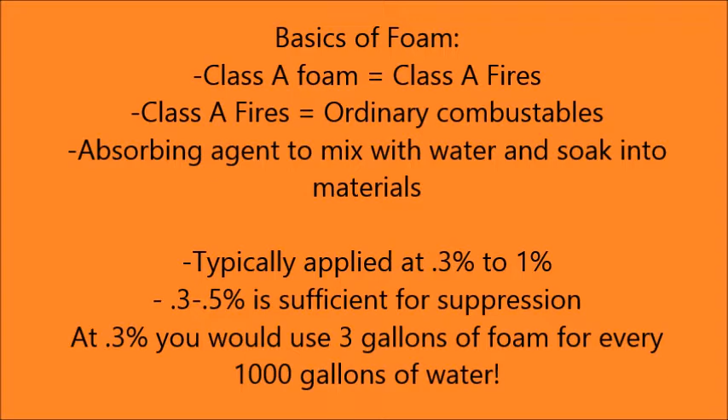Unlike Class B, you can also mix it. We can use our Class A foam for a while and then decide, you know what, we're wasting it. Let's shut it off and use straight water. Where Class B, once you revert to foam, you're going to stick with foam. You can't change it to water or you're going to break your blankets of foam, dilute it, and it'll be insufficient.

Class B foam, again, for Class B fires. Class B fires are flammable liquids. With Class B foam, the whole purpose is to create a foam blanket that suppresses the vapors of the flammable liquids. This could be for offensive or defensive. So you're trying to put a fire out, you suppress those vapors, the fire goes out when it loses its oxygen. On a defensive side, you'd look at it as you don't want that to ignite. So we have a leak, we're going to put a foam blanket down, and that's going to suppress the vapors from reaching an ignition source.

Typically, Class B foam's applied at 3 to 6%. All depends on, again, manufacturer recommendations and what you're using it on. We run AR-AFFF in our trucks, which is alcohol-resistant aqueous film forming foam.

Being the alcohol-resistant foam, if you read the buckets that the foam comes in, to get the alcohol-resistant, you need to run at a 3% concentrate. My bad, 6% concentrate. 3% concentrate is just for a straight AFFF, non-alcohol. So read your ERG, see what application rates you are, what you need to run at, and whether it's a polar solvent, hydrocarbon, what type of fire are you dealing with and what do you need to apply.

Typical fires are Class A and can utilize Class A foam. I put less than 5% of fires are Class B fires. That's probably less than 1%. I mean, if you really think about when's the last time we had a Class B fire, a flammable liquid fire, something we had to use Class B foam on. I'm not saying, hey, remember when we threw that Class B foam on that car fire? A true Class B fire is probably less than 1%. But definitely less than 5.

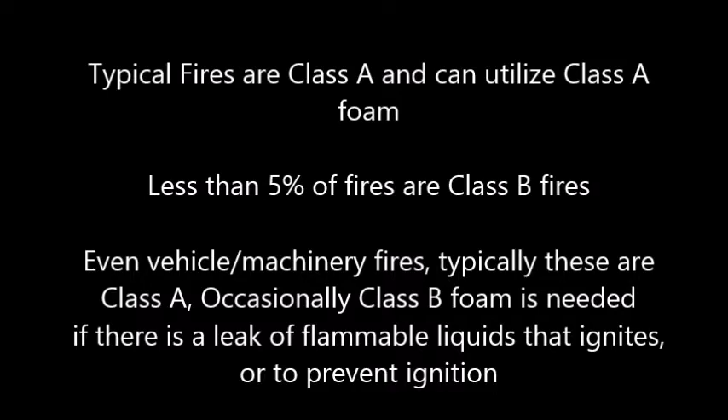Even a vehicle machinery fire, these are typically Class A fires. Occasionally the B foam is needed if there's a leak of flammable liquid that ignites or to prevent the ignition. You're going to need B foam. Everything prior to that, you're going to be Class A. Class A for the contents of the vehicle, even the tires, Class A, you're going to benefit. Again, the only time you're going to need the Class B is flammable liquids. Create that blanket, suppress the vapors, and you won't have a problem with it.

We're going to be going over the benefits of the Class A foam. Again, with most of our fires reverting to Class A. CAFS, typically you're running Class A. You can use CAFS on Class B. Yeah, you can use CAFS on Class B. We'll get into that here in a little bit. But I want to go over the benefits of Class A.

Class A foam, you're going to have a faster knockdown, less chance of rekindling. That's proven. That's science. You know, the more I'm around, the more we're going to try to run this, and we can prove it. There's going to be a reduction of water damage, better preservation of evidence. That has a lot to do with the water runoff, less amount of water you're putting into a building, less damage overall.

A lot of improved efficiency of water, less tanker trips, less time on scene. You could go on and on. Less manpower, less fuel. It's going to change kind of everything. And hopefully we can figure out, and around our area at least, be the first ones to witness it.

Class A foam, you have the ability to make it a wet or dry foam. Dry is referred to as a shave cream type foam, and wet is going to be referred to as a watery foam. Basically, it makes water better. Your dry foam, that's going to be used more on exposure protection, something you need a really sticky blanket, stick it right to a wall so it stays there.

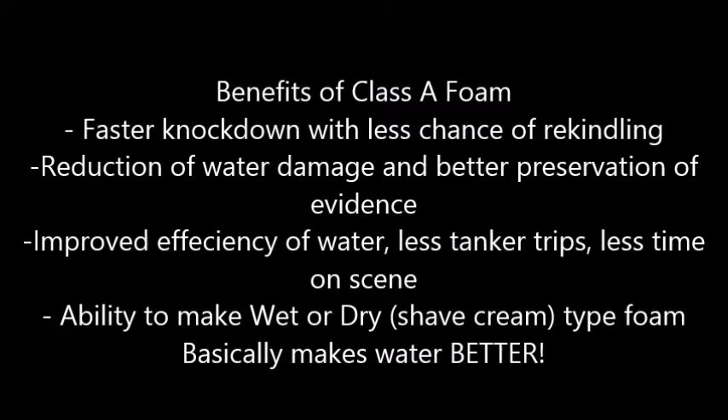Without foam in the water, surface tension holds it together, beads it on top of the surface. Tongue twister. Basically, water's a big bubble that doesn't want to break apart. It sits on top of whatever you put it on. That's what makes it so hard for water to soak into materials and penetrate into them to put out a

fire. About 80 to 90%, more towards the 90%, of water being applied to a fire is wasted in runoff. Think about the last time you ran a hose line spraying something and water's running everywhere. It's bouncing off of what you're hitting. It's running down a ditch, out of the house, out of a doorway, anywhere. Water is running.

That's all water we can't reuse. It's gone. So in a sense, we wasted the water, even though we're trying to use it to cool. That leaves only about 10% that is absorbing into those materials. With foam in the water, the surface tension's reduced. Water will rapidly spread out and it soaks in. We're going to get into some demonstrations here that'll show you that, and hopefully you'll understand.

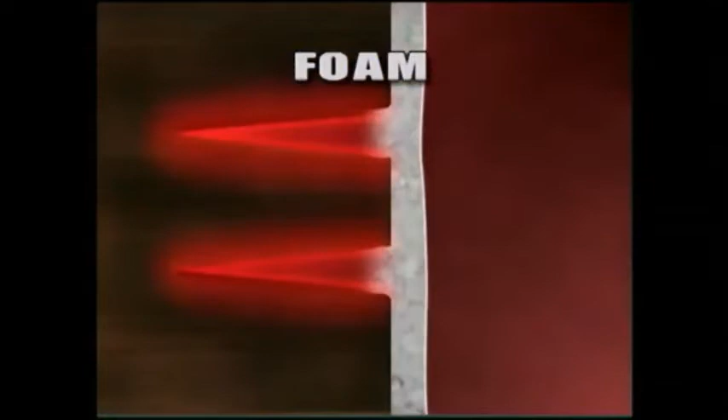When we do, that CAFS is going to break that bubble structure, reduce that surface tension, and it makes water wetter. It's going to be able to penetrate through into those cracks and crevices, into that material, and efficiently put that out. You will have a little runoff, but it's not going to be like water.

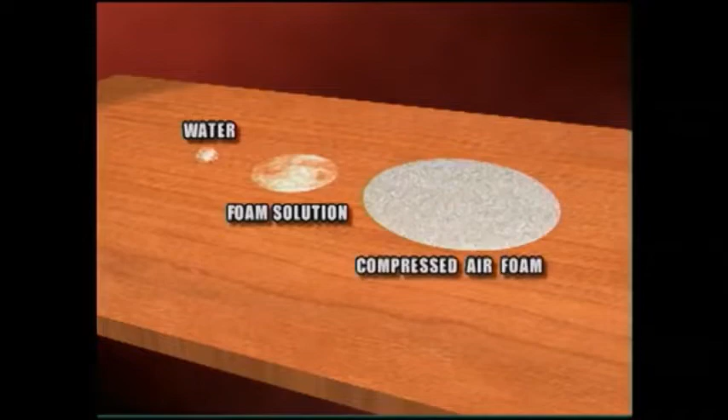With this demonstration, this is water, a foam solution, and CAFS on a board. If you go to turn that, there's all your water running off. There's your foam solution running off. That CAFS is sticky. We can make it stick to anything.

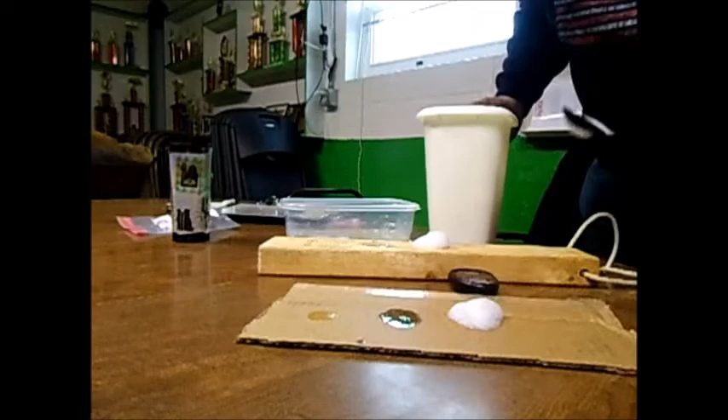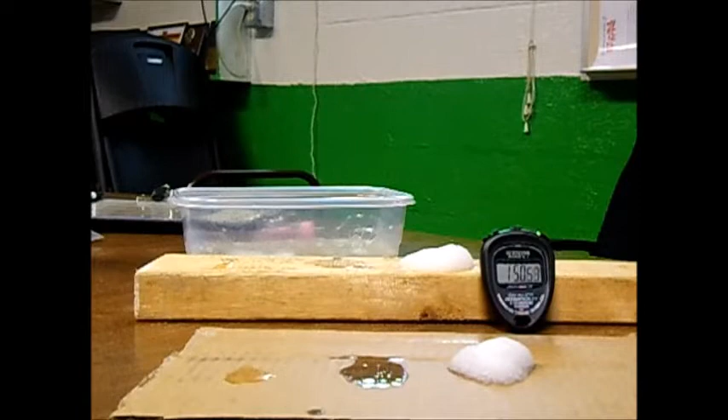So here we are doing our own experiment at the station. That's a milliliter of water, foam solution, and then a CAFS we used. Obviously, we don't have compressed air. We used a stirring stick and beat it up. Run the timer, and we want to show you with all this, what is our runoff in real life.

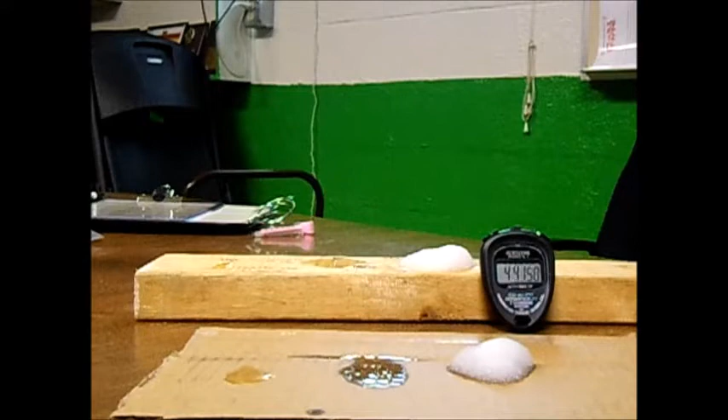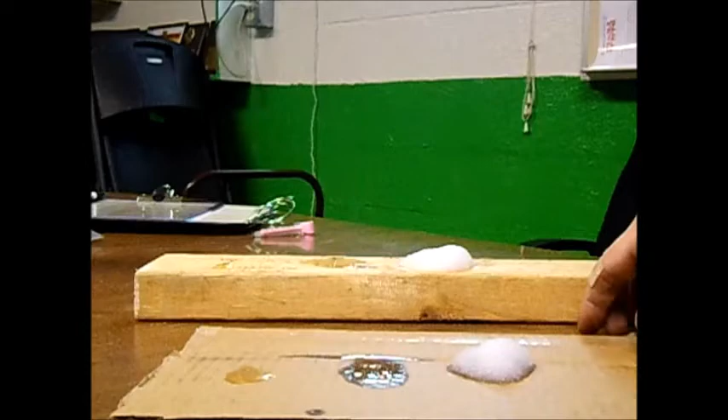As you can see, that water sits on the cardboard. It sits on the 2x4. Your foam solution is already soaking in. Look how dark it is. We've gone 6 minutes now. We're going to tip this cardboard up, and instantly that water runs off. Boom, there goes your 90% of water.

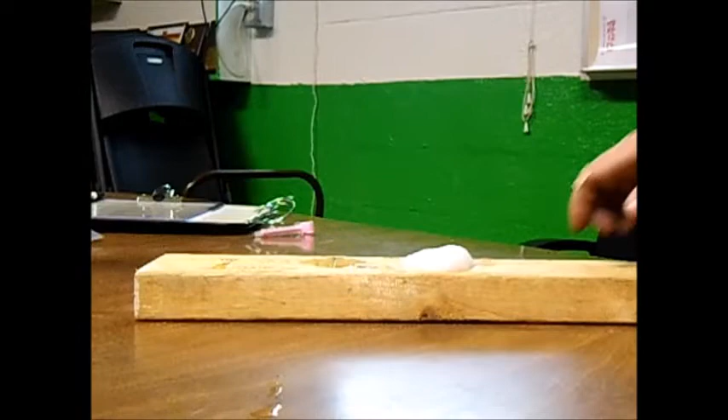Your foam solution, it is moving. That would be equivalent to using a foam pump through your water lines, but your CAFS is stuck there. You have all those bubbles, they're not moving. Same with your 2x4. Water's going to run off. Your foam solution's going to slide. Your CAFS ain't going to do nothing. It's there, it's absorbed in the material, that's why it's a darker spot.

And if you try to relight this, you're going to be unsuccessful. It will not light. The water, what's left of it there, is going to evaporate, and then it'll relight. That's your leftover water on the table. There's your foam. No CAFS. That's all your runoff out of 1 milliliter.

Moving on to filling the foam cell. You want to fill from the top of the truck with the screen in place. This will prevent anything from falling into that tank. I see a lot of people sometimes, when they're trying to check the level, pull that screen out to look in there. If something falls in there, it's not coming out. We can't get it out.

In that second picture is the service shutoff valve. That's how the foam's coming out of the tank. And it's approximately 1 inch in diameter. Tiny. Your eyeglasses, anything goes into that tank, it will stop right there. It will not make it through, and you no longer have foam.

Something definitely to think about when you're filling it. Leave it in place. If something falls, you can pick it out of there, and it's not a big deal. When you're filling it, you want to pour the foam into the fill tube. This minimizes the aeration in the foam, because essentially what you're doing is filling from the bottom of the tank upward.

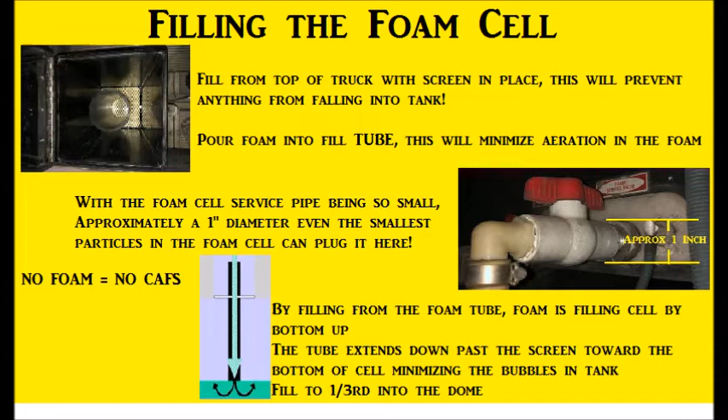And you want to fill that to about 1/3 into that dome. So make sure your foam tank is full. Above that screen, you're able to see it. And life is good. It's full. Look at your meter on the truck, see if it's still full. And then from there, you'll have foam. Remember, with no foam, there's no CAFS. So without it, you're back to straight water.

Now we're going to get into CAFS, compressed air foam system. Before this truck, we had foam systems. We injected foam into our water to make a foam solution. We have never made CAFS. You're adding air. You're adding air into your foam solution. That is all we're doing here. Nothing crazy. Hopefully, we'll get to the point here where we're all comfortable running CAFS. We're all comfortable with foam systems. A big asset, but let's see what it will do. Let's figure this thing out.

Now here's an old video, but yet very true. So we've all been to barn fires. We've all been to controlled burns where we really let things get going. This video, they're using 1 3/4 hand line run off of CAFS. This will kind of give you an idea of the power. I love this video. It really shows what it'll do. I mean, they get this thing rocking. It's going. Imagine yourself on the end of that hand line with water. What can you do to this fire?

When they start spraying it, if you were to do that with water, would you make a dent in this thing? I believe it takes them about 12 seconds to knock this down. And they do it pretty efficiently, quickly. I know we would have 2.5s or a pipe on there, stick up in the air, putting water on it. Look at that thing go. That is pretty cool.

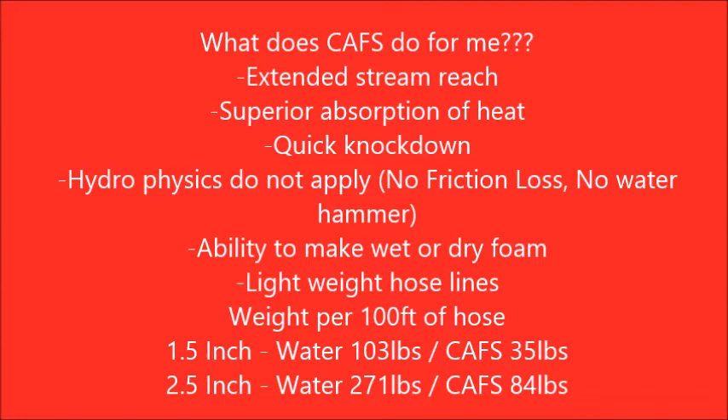Again, your dry foam is going to make awesome exposure protection. I mean, you look at this video, you ain't lighting that on fire. I don't care what you do.

Yeah, pull it. It is full. It's full of our CAFS mixture. Alright, we're shooting CAFS. That's good. Alright, now pull it. Excuse the language. That was Assistant Chief Kayla. Alright, drop a cone, Nick.

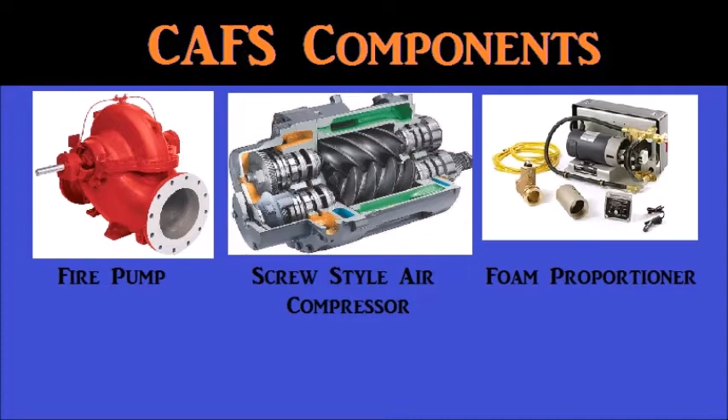So your fire pump is going to build pressure to push water. The foam proportioner is going to figure out how much foam that water needs, and then your air compressor is going to pump the air into that to start scrubbing that foam. One important thing to remember, as soon as you turn that CAFS compressor on, the air compressor, you must be moving water. This is what cools that compressor. It is run off of a drive shaft, so if you overheat something there, it could lock you up.

You have to circulate water in your fire pump anyway. So get in the habit of, when you put that thing in pump gear, open your tank to pump, open your recirc valve. That's the first thing you need to do. Then you can turn your CAFS compressor on. Even if you're using the air outlet, you have to move water. So circulate your tank, use your air outlet, or whatever you need to do to keep that compressor cool.

Especially remember this when feeding from an auxiliary water supply, another truck, a hydrant, where you're not using your tank water. If you're not moving water, they close those hand lines off, you're done. So recirculate that pump. All right, let's get into the nitty-gritty on how to make CAFS. It's really not much different, just adding a few steps to what you would typically do.

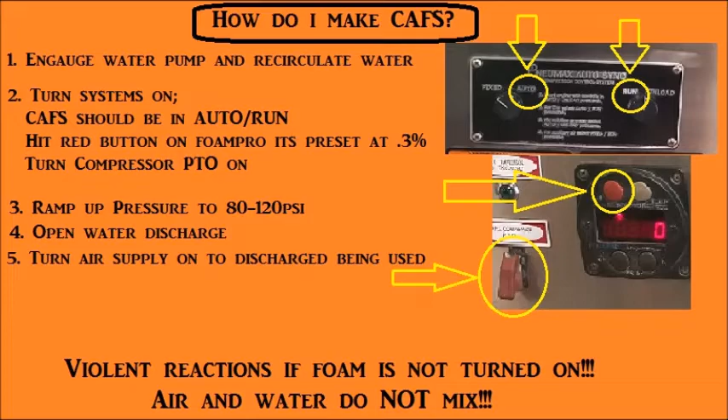So when you're running an air tool, let's say, and you set your pump pressure, you're going to make sure that your air pressure is what you want it to be. On that fixed side, when you run up to 200 psi on air pressure, some air tools ain't even designed for that. We don't have airbags, but if you were going to use that for airbags, you would have to check to make sure you know what psi you need to run that on. Like I said, leave it on auto, run your pump pressure to what you need it to be, and that air pressure is going to be right about mixed in with it.

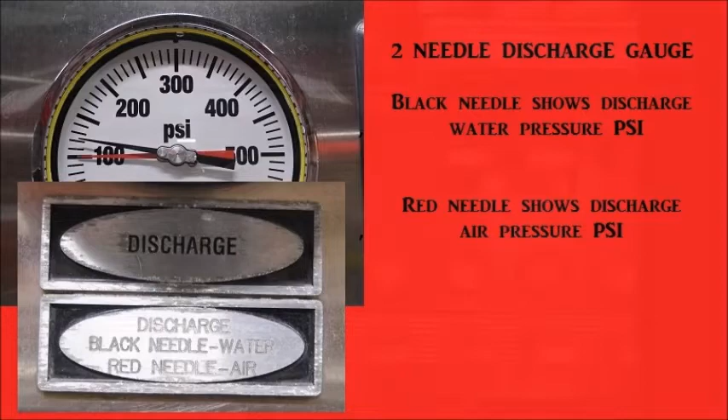You need to check to make sure you're running a foam line before you decide to use CAFS. All of our pre-connected lines are foam lines. They make it pretty easy on the pump panel. They label them very well with red and white stickers that say foam, and everything is in the same line. So when you go to pull the discharge, you can see I circled one in yellow. You pull that lever, right above it is the air control knob to turn the air on for that discharge. As you can see, above every discharge, there's an air valve. Of course, that's to the ones that run CAFS.

Up on top, at our crosslays, it's labeled there as well. This crosslay is a foam discharge. We can run foam, we can run CAFS. So again, when you go to pull that discharge, pull the discharge, reach up right straight above it, and turn on your air supply.

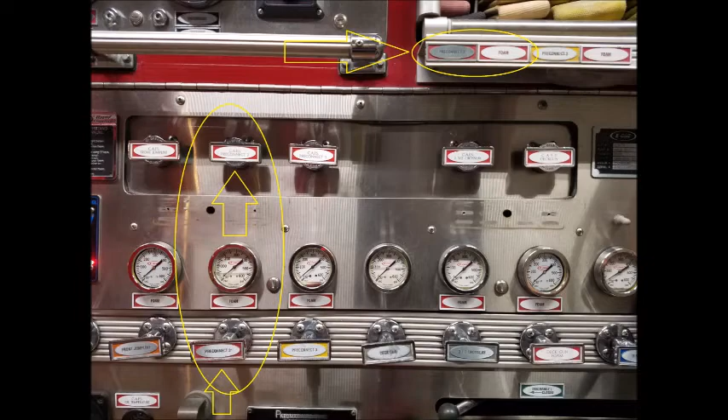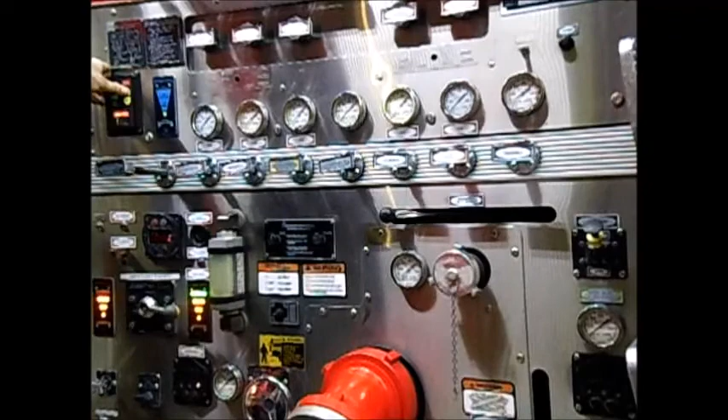Let's do our startup process. Tank to pump, recirculate, foam on, air PTO on, auto run on our auto sync, and we're ready for some RPM pressure. Let's boost that up to 90 psi. And from there, we're going to pull our discharge just like we typically would to send water. Right strictly above it, 90-degree turn valve. Our air's on. We are now making CAFS to that line.

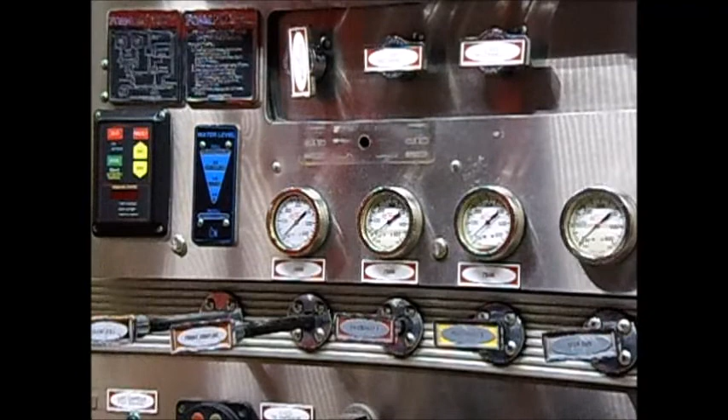What else can we do with that CAFS? What can we do with that air compressor? Let's think outside the box here. We've talked about running air tools. Of course, we have an air supply. We can run air tools. What about putting air into tires? Hopefully that's not a problem, but if it is, we can fix that. Drain hose lines. You know, we always do the old disconnect every line, run it down a hill, put it over our shoulder.

Let's get all the water out of there so we can roll it up and take it back. How about you shut the water off to that line and leave the air on, or turn the air on? Maybe you didn't even use CAFS. Let's use the air compressor, because we put that in for burnout, and let's turn on that air compressor and just push the water out of those lines with the air.

You know, that's something we can do. Maybe it's on a cross lay. We do that and put it right back on the truck. You know, there's a whole bunch of things you can do. We can do airbags. Like I talked about before, we need to know the pressures and stuff like that. We would obviously have to have the hookups.

Flotation device. I was talking to Paige the other day. What if we use our hose on our trucks for a flotation device? We have French Creek here. We have a lot of hose on our trucks. What if we took 600 feet of that, connect a couple cross lays together, take that and stretch it across French Creek with air in it? Fill it up with air. You now have a device all the way across that creek with air.

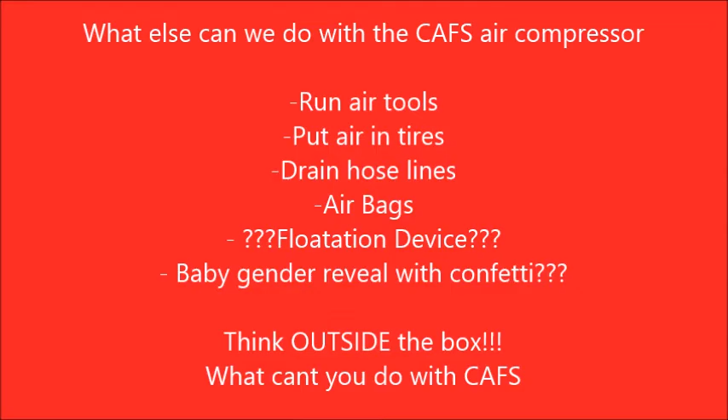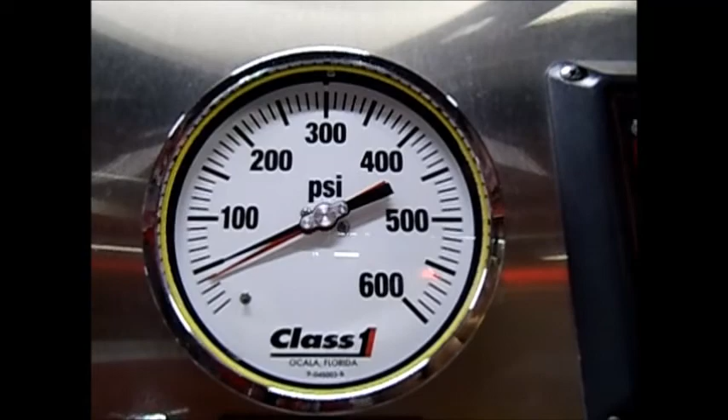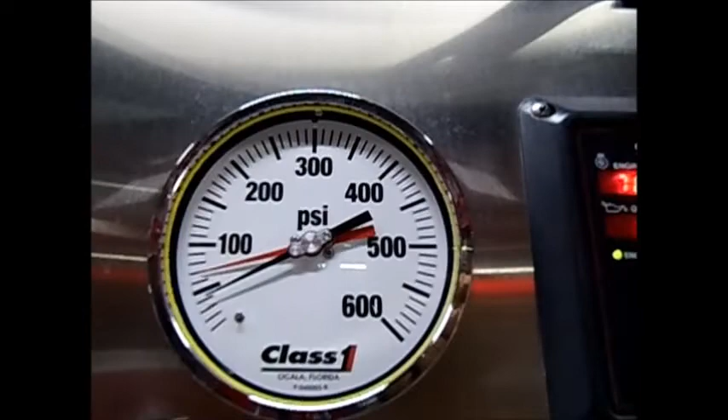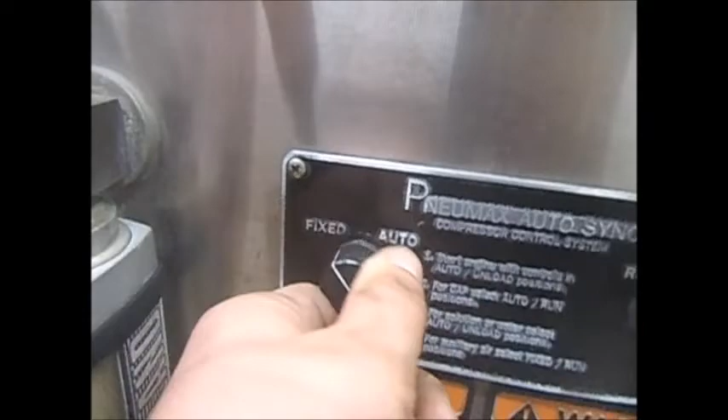This is a demonstration of the auto sync controls. We are in auto mode right now. The air is auto balancing with our pump pressure. You'll see I'm changing the pump pressure up and down, and the air is equalizing with it. Now I'm going to switch it over to fixed mode. That's going to auto ramp that air pressure all the way up, almost 200 psi, and hold there. It gets very loud because it blows off. That's going to be that dust and smoke you see. You go back to auto, it's going to go back to balancing. Easiest way to remember: always leave in auto, adjust with pump pressure.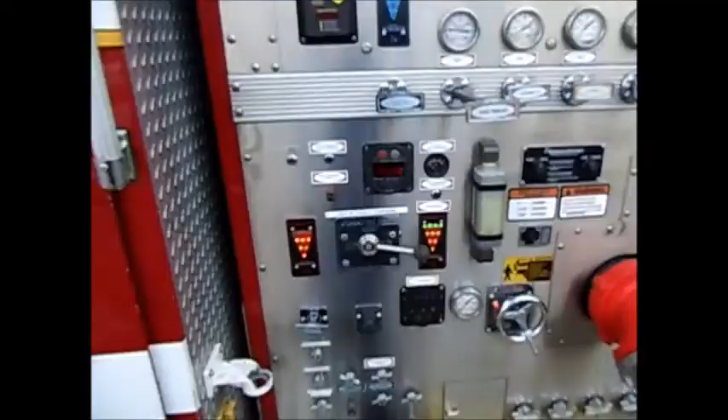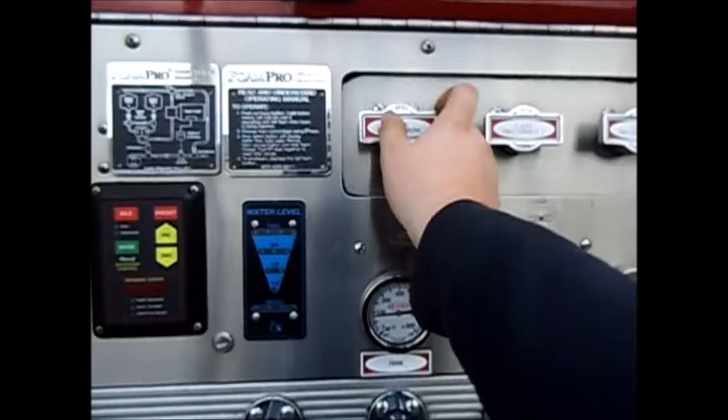We got our CAFS compressor on. The air in this valve here is injected after this water. So we can completely close that, and then we can give them straight air. It's going to jump. You're putting air into it under pressure. That's just all the water in the hose line. We have our water gated off. And you see it jump. There is pressure on there. It's heavy. It's pushing you back even though the hose feels light. But this is a way we can drain our hoses on scene and get rid of anything in them.